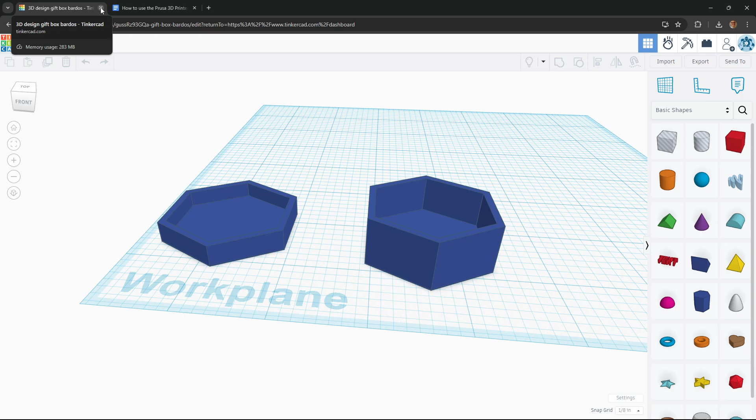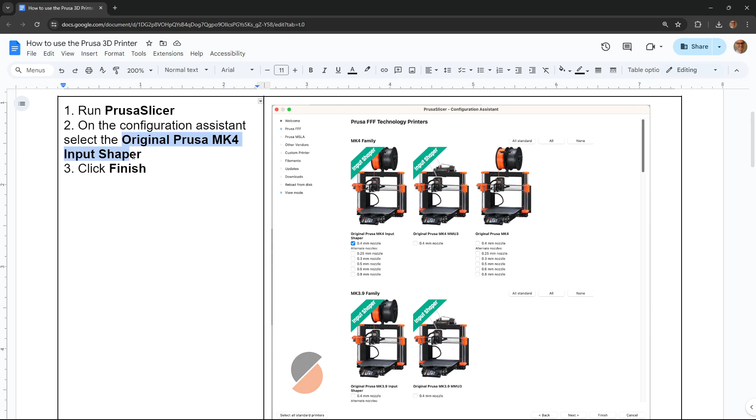When you run Prusa Slicer, at first it's going to show you a screen to pick which type of printer you need. You're going to pick the original Prusa MK4 with input shaper, then click Finish, and once you do that, you'll get into this page.

I'm not going to slice the design I showed you because I have something else I want to print right now. So what I'm going to do is just drag and drop the STL file onto this picture of the platform, the platter.

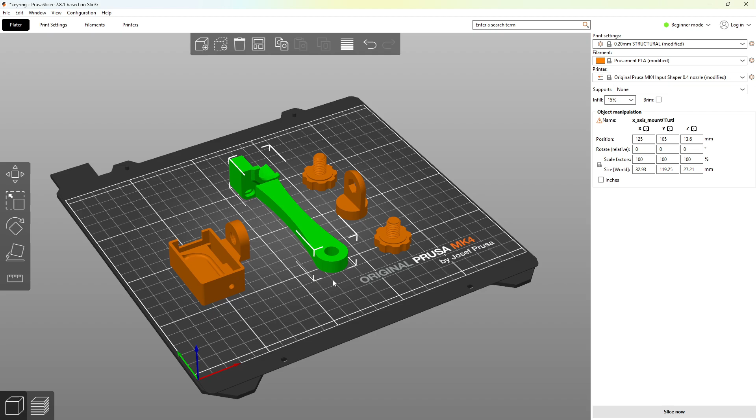When you do that, there are different things you can do. For example, you can just move this stuff around. I dragged and dropped many different things that I wanted to print on here, and you can move them around.

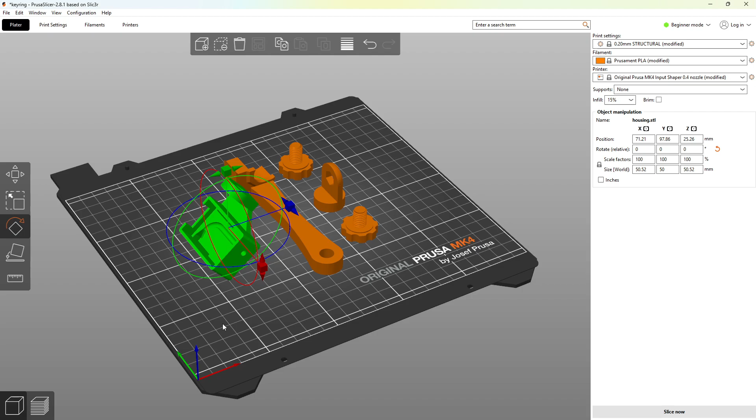If for some reason they're messed up, like they come in sideways, I'll hit Command Z and undo that. You can rotate it so it fits, and when it looks about right, this is also a good check to see if you have the right size. You can see what these lines look like on the actual 3D printer to check the size.

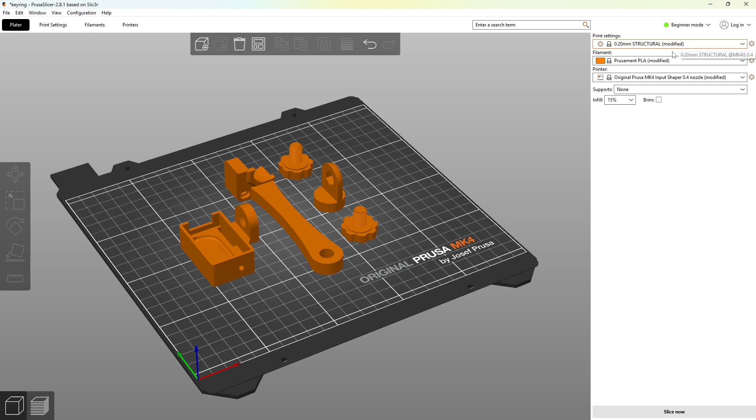When you're ready to go, there's a picture on the wall with the right settings you should have. They look like this: 0.2 millimeters structural, and you can use Prusament PLA, or if you're not using the Prusa brand, a generic PLA—either would be good. We have PLA, which is a type of plastic that we have.

You're going to use the printer you picked in that first step, the original Prusa MK4 with input shaper. If you have overhangs—places where the plastic will stick out over air—then you'll need to add supports, so you'll make supports go everywhere.

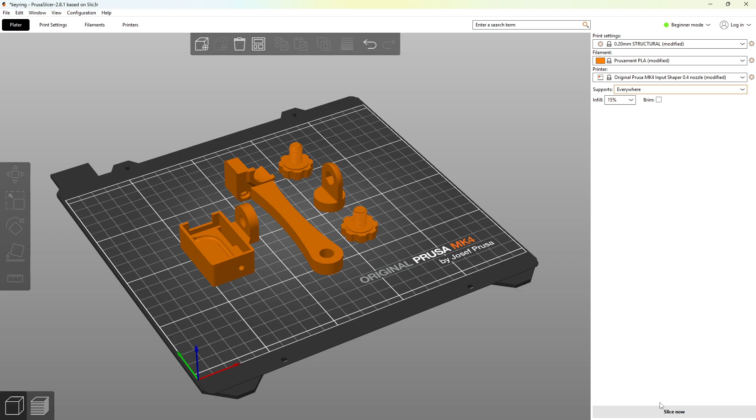In this case I don't want to do supports, but let me show you what it looks like. It'll build up the holes and fill them in with pieces of plastic you can take out later. In this particular print I don't need it, but for the most part, if you have overhangs, you will need it.

Then I hit the Slice Now button on the bottom, and it shows you what it looks like. If you want to see what the print will look like, here's how it'll print—it'll start here, build the print up, and you can kind of see what's going on.

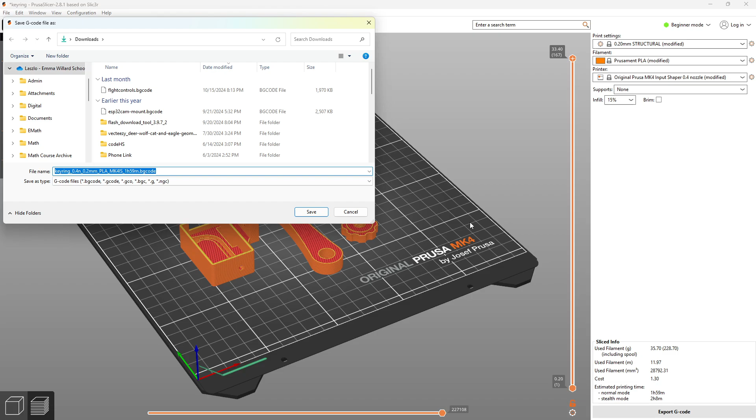When you're ready to print, you'll have to export the G code. So I'm going to export the G code, and I'm just going to put mine into the downloads folder, but I do want to give it a name.

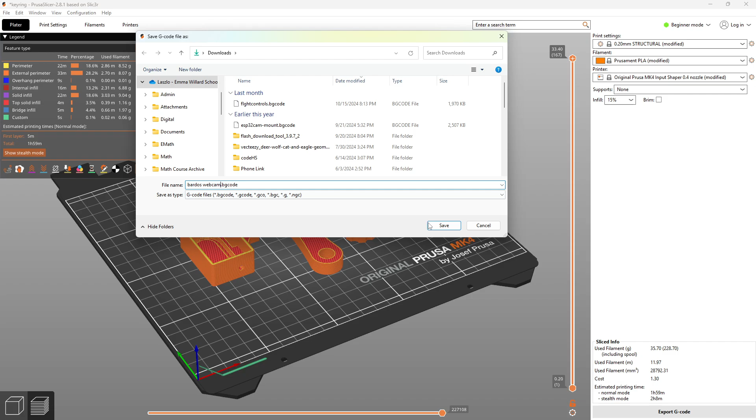Let me get rid of all of this stuff and give it a name I can remember—Bardos, for the webcam that's going on the 3D printer. You save the file to the downloads folder, and from there you put it onto a thumb drive, take it over to the printer, and plug it in.